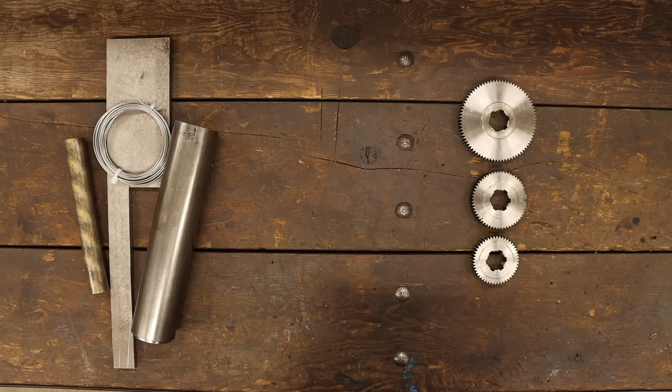The middle of projects is always a bit dumb. We're not where we started, but we're also not where we're going. We're just in the middle. I'm working on the Eureka gear cutter tool from this book about, shockingly, gears. So far I've made this, a useful-ish device, which basically just spins, but also makes these ear-wateringly delicious clicking sounds. There's so much more to this thing though, and even more than that to being able to properly use it. But I'm getting ahead of myself. We have the whole middle to cover, so let's focus on making this thing a little useful-er.

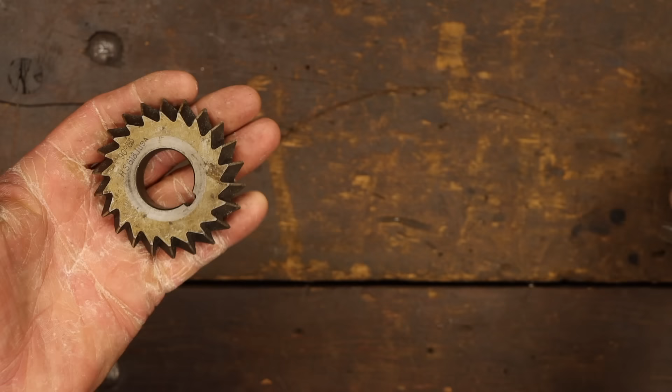In case I glossed over it too fast, this Eureka gear cutter tool is a contraption that should allow me to make my own gear cutters, so that I can make my own gears, so that I can say I made my own gears. It may also have something to do with this machine as well, but that's way down the road.

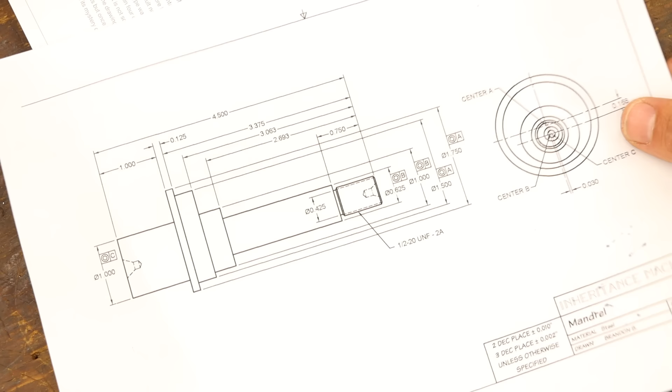Let's just pick up where we left off last time. Like most big hairy projects, it's best to start with the hardest part first, and the mandrel is definitely going to be the most challenging, but not this one, this one. Naturally, I've been making changes as I go based solely on hunches. Hunches about a tool I've never actually used, but I digress.

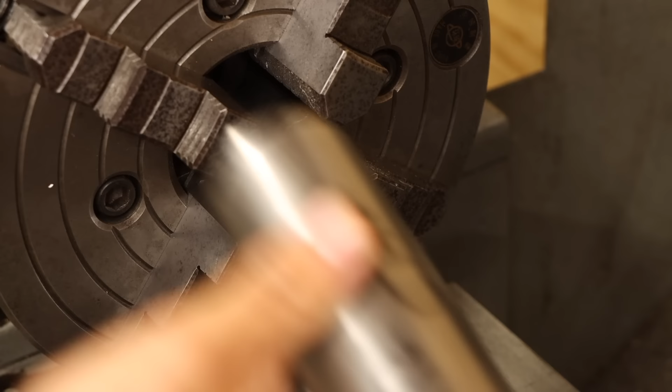While it seems like a simple shaft with some different diameters, if you look a bit closer, you'll see that it's a bit eccentric in nature. There are 3 different axes through this part. One for this diameter, these 2 big ones are on another, then everything on this end is on a 3rd axis. So the four-jaw is going to be earning its keep on this part.

After truing up the stock, I'll immediately untrue it with 2 opposing jaws to approximately 0.168 inches, which actually needs to read twice this value on the dial indicator. Trust me, forgetting this is a mistake you only make once.

With a little emotional support from the tailstock, we can start on some of the more punishing operations. Interrupted cuts like this are generally really hard on both the tooling and the part, so I'm going to use this round insert with a much larger radius. This lets the cutter more gradually engage with the metal as it comes around, rather than impacting the cutter all at once and shattering this brittle carbide insert.

Here you can actually see it without anything moving at all. The cut starts here, then gradually builds because of the radius of the tool. In non-machinist talk, this is more of a swoop swoop swoop rather than a chunk chunk chunk, if you know what I mean. Let's keep moving.

I've finished this end completely, but only got to start on the rest of the length. Why I did this will make sense in about 38 seconds, so let's part this off.

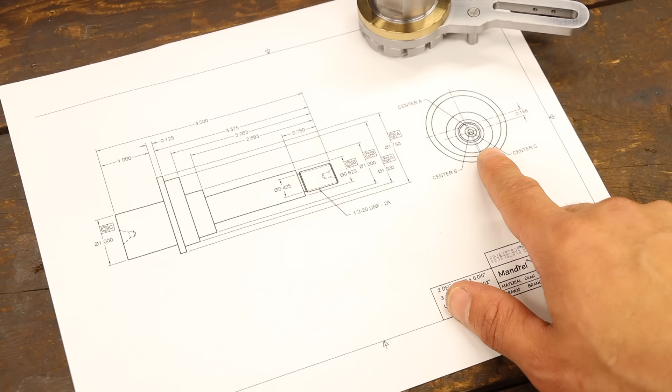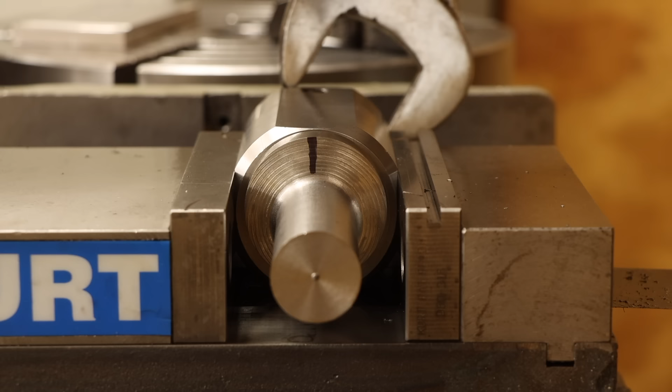Now this is where things get messy. Remember, these diameters have different center axes. So to keep things square, that's exactly what I'm going to use. A square collet block. But this only works if I get the part straight in the block as well, or in this case, just straight-ish. It's important, but I have some wiggle room, so no need for indicators.

Now this whole ensemble goes right back in the lathe, with a little protection on the jaws this time. And here's why I cleaned up that other end, just so that I can use it to indicate it back true. Pays to think ahead. But that isn't to imply that I'm an expert at it.

Case in point. I have to face this end to the correct length, but now I have no idea how long it is because I crammed the other end down in this collet block. Oh, I do know the distance to this face though. So I'll clean up the other side of this flange thingy, measure that thickness, scooch over that amount, zero the DRO, and crash the lathe.

Fuck me, I saw it right as I threw the switch. I was like, that's gonna fucking crash.

Nice. I think that's my sign to call it a day.

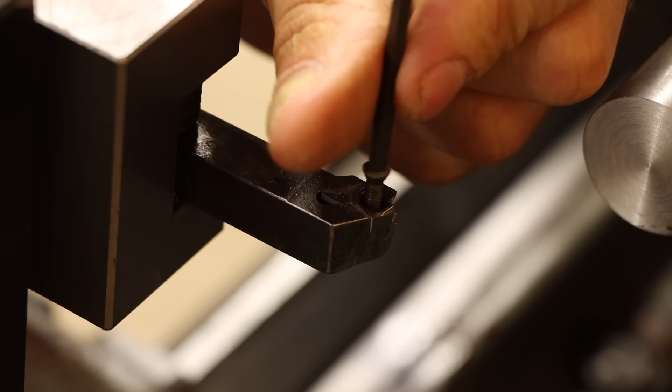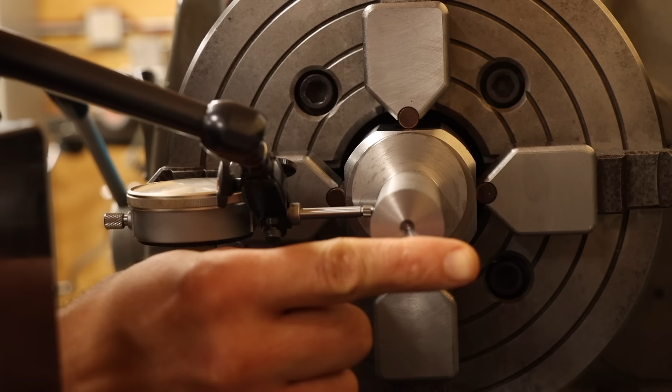All that setup and heartbreak was basically just to get this center drill in the end, which I don't even get to use because it's time to work on the eccentric stuff. And herein lies the advantage of the collet block - since each of these offsets are at right angles to one another, I'm pretty much guaranteed any shifts I make with the jaws will also be at right angles to one another, or at least really close.

So this first offset of 30 thou is just a matter of shifting jaws A and C. And I hope it's obvious now why I can't use that center drill from before. But it'll have a purpose later on, so hold your horses.

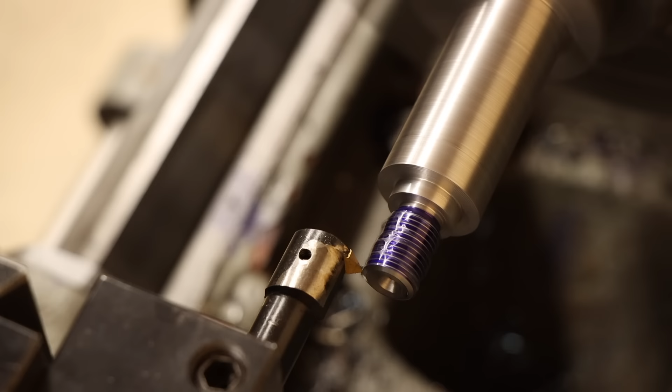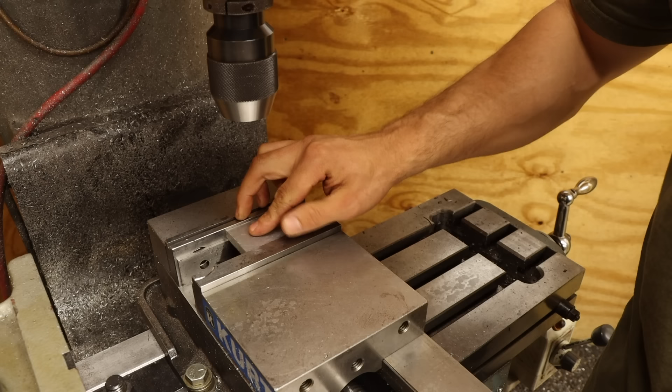Like most single point threading, I'll check the progress with the 3-wire method. But that doesn't necessarily guarantee a good fit with the nut that will go on here, so over on the mill, I'll make one real quick.

Don't worry, this isn't the actual nut I'll use. Of course I'll do better than this, but I need the lathe to make that, and well, it's occupied.

Perfect. After turning down the rest of the shaft, I'll do a light honing to perfect the fit with the spinny clicky contraption.

Oh, sexy. Okay, one more offset for the largest diameters on the part, this time shifting jaws B and D.

And here I just turned down past that carbide destroying mistake. Add another smaller diameter, then of course add some chamfers on here. Then boom, boom - one mandrel finished.

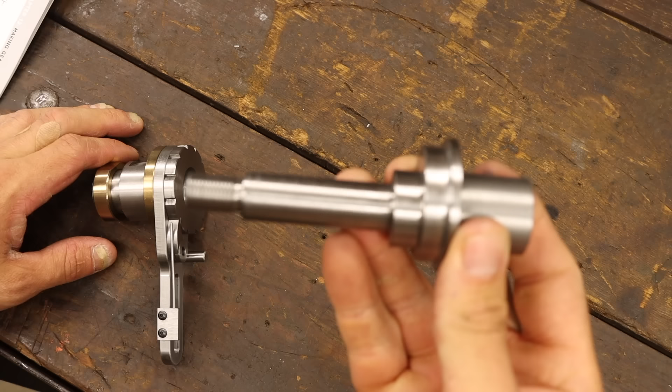And so far it looks like everything came out right. Of course it's hard to tell without seeing this thing in action, but a lot more parts to make before then. So let's go ahead and make the real nut that's supposed to go on here. The original design calls for just one nut, but I don't like that for a multitude of reasons, so I'm going to make 2. And this seems like a perfect opportunity to maintain the bronze accents I've been adding throughout this build.

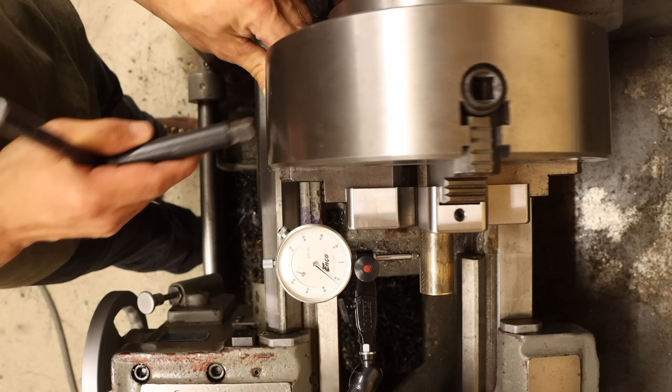I definitely prefer to single point cut these threads, but my smallest tool isn't small enough, so I'll have to tap these by hand, hence using the tap to make the test nut I did earlier.

The only trouble with tapping this is I can't be sure that the threads they make are truly square to the faces of the nuts. I do have a fix for this though.

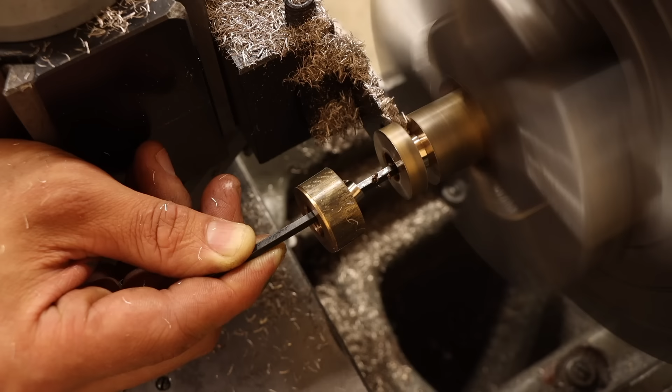Square is good, but it's also boring. So over on the mill, we'll make these more nuttier, with the help of the collet block, of course.

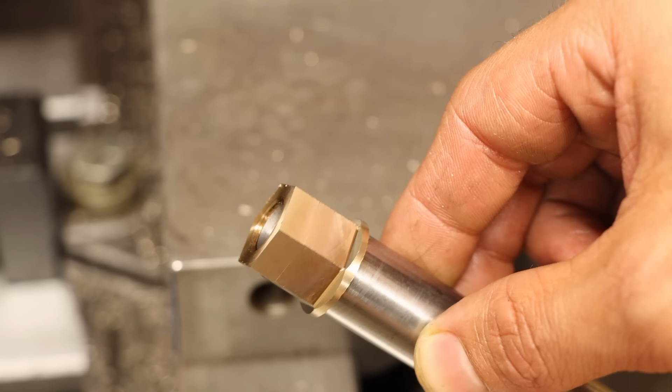Almost done. My obsessive chamfer disorder can't allow these to be finished parts, so it's back to the lathe.

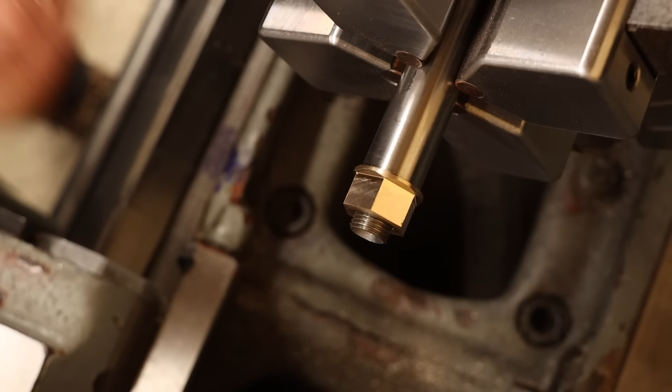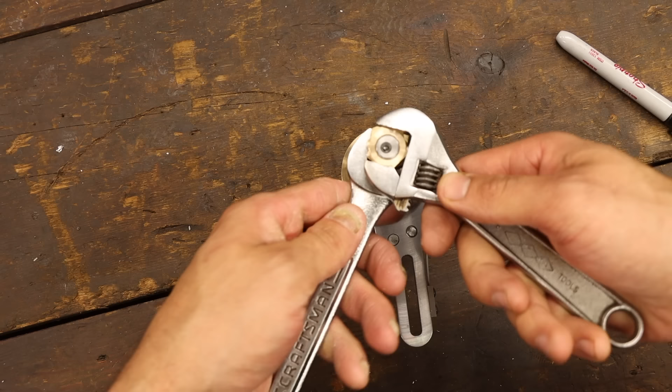That's the stuff. Okay, now why did I make two? Well, the first holds everything together, then the smaller holds the first in place. This is called a jam nut, and it looks great, except for one problem: when I crank them down, now they don't line up.

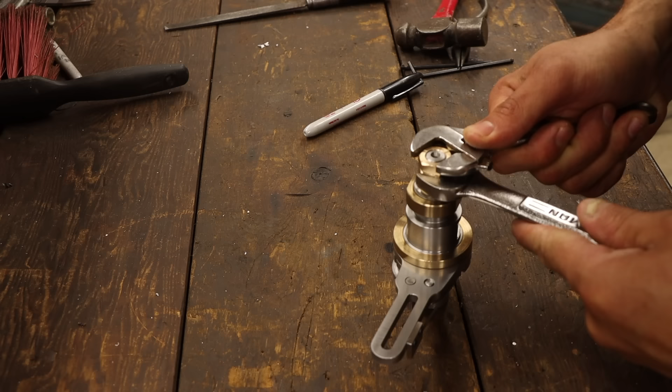Unacceptable. But a quick pop in the lathe to skim down a few thou off of one face, and now these clock together perfectly. With that, now I have a fine looking spinny clicky doodad.

But this is clearly imbalanced. I'm going to need the second clicky to even this out. So let's work on that next, starting with the ratchet plate.

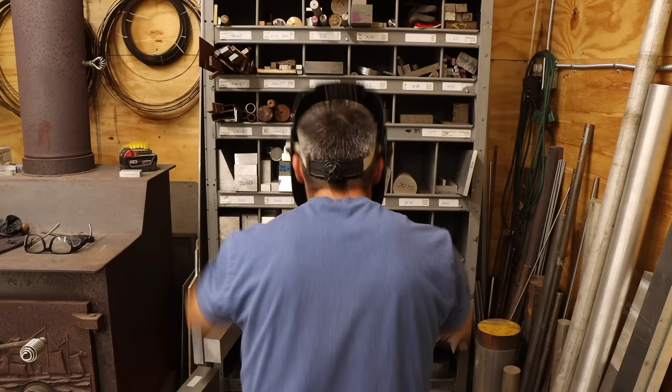I don't really want to go through the process of squaring up a bunch of stock to make this, but maybe if I pray to the material bin gods hard enough. Hey, it worked! Okay, let's jump into the fun stuff, starting with some holes and slots.

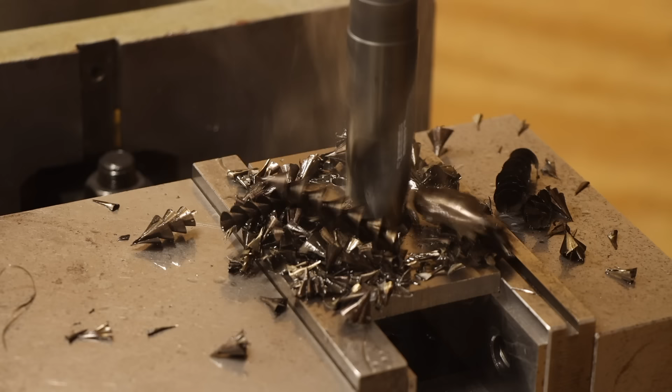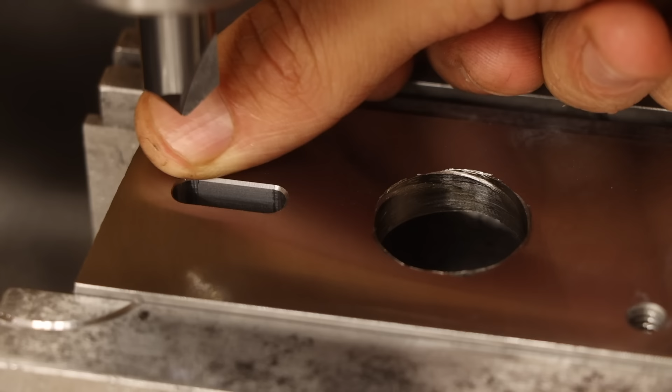We love a chamfer. Time to open this big guy up even more. And this next part might be a little, well, I don't think I even need to say it at this point. Sorry, I know this joke is getting a little...

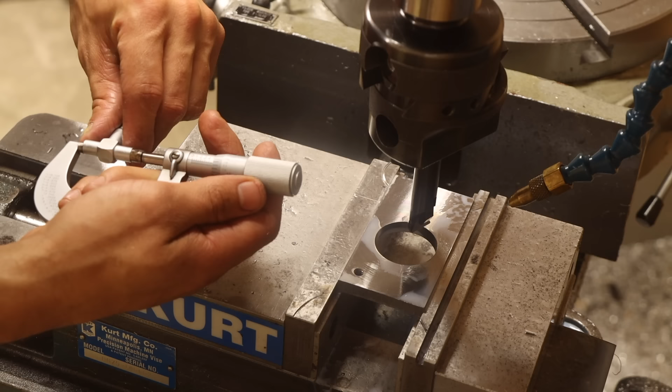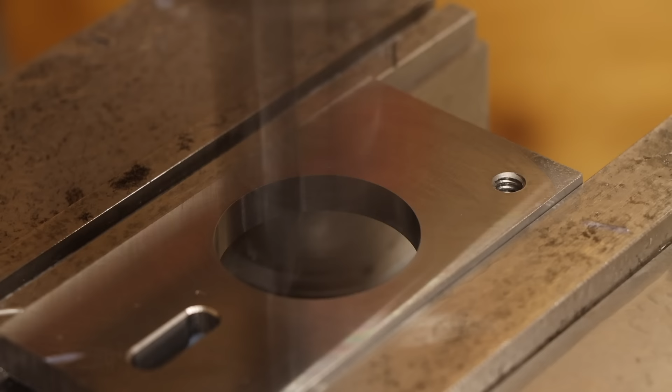After a little funny business with the insert, I can also chamfer this big guy, then flip it over and do the deed on the other side. I'll relocate the part with a gauge pin and the spindle, then continue the glorious chamfering action.

Okay, that's all the penetrations, time to work on the perimeter. And that's a perfect job for the honkin' rotary table that's been hanging out in the background of the mill this whole time.

After finding the center of the table with the coaxial indicator, I'll pop the part down and use a gauge pin to locate on the end of the slot. This gets it centered, but who knows if we're square. So I'll tram along this edge, spinning the rotary table a little bit until there's no more movement in the indicator. Then of course reset the table's dials.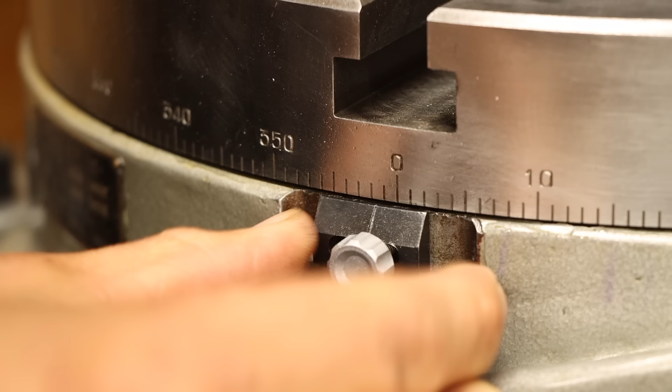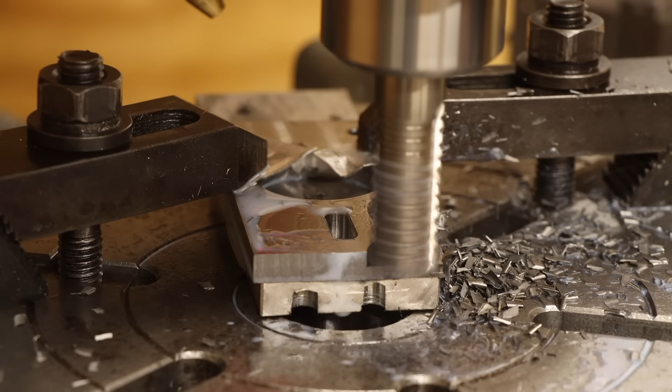Now for some chips to go with this fish. I'm using a roughing mill for the heavy lifting, first milling straight along here, adding the round on the end, and finishing straight again on the other side. The roughing mill doesn't leave the best finish though, so I'll do that all again with a finishing mill.

And while we're here, might as well add the most important features.

Alright, now for all the big rounds around the big hole. Don't exactly have a gauge pin up for the job, so it's back to the coax. First tapping the part into place, another tramming job with the indicator, and I think you can figure out the rest. Now I'll admit, I cheated a bit at this point.

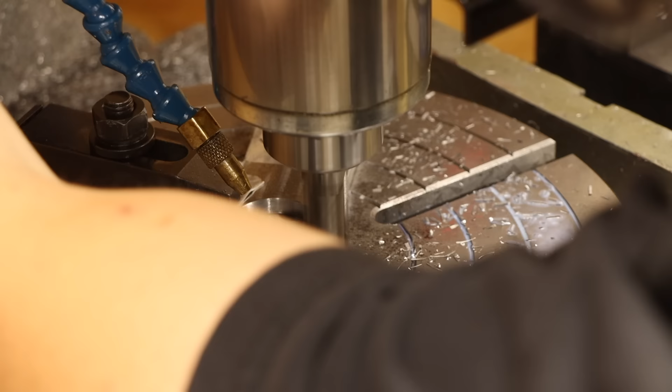The drawings for this part didn't include much in the way of angles, and by that I mean literally nothing. So I went ahead and modeled this part so I can project more angles than I actually need.

The last bit is this little dude on the end, which is around this threaded hole. So what better way to center it than to use the very tap that made that hole. Bada bing.

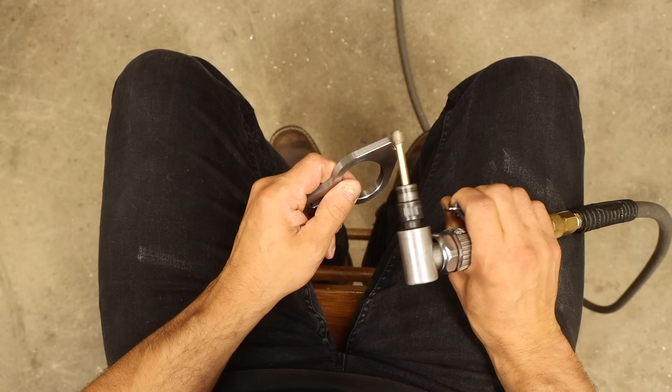Looking great, but now I have chamfers to do on the other side. I could go through the trouble of setting everything up again, upside down, or I could just... I think that's perfectly acceptable.

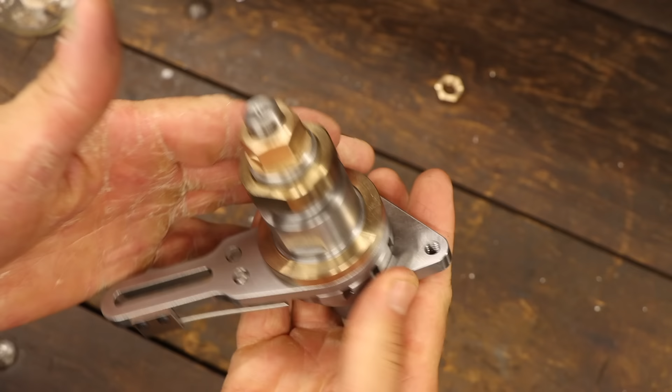With that in place, we're getting really close to some more clickety-click noises. So let's make the bit that will sing those sweet serenades: the ratchet pawl. This is basically identical to the pawl I made in the last video, so just enjoy.

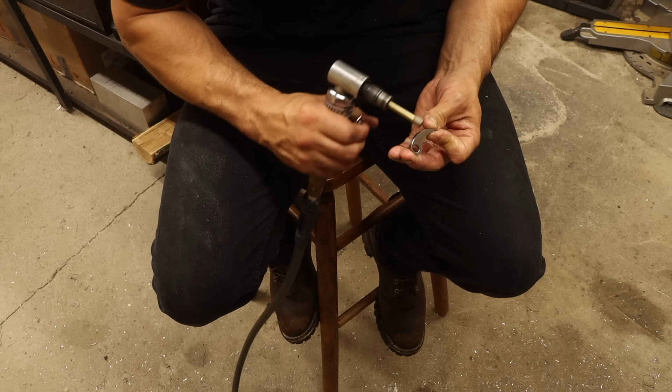Alright, well it wasn't without hiccup, we made it. But it isn't ready for its performance yet. Not without the backing tracks. And by that I mean the pivot screw that holds this in place.

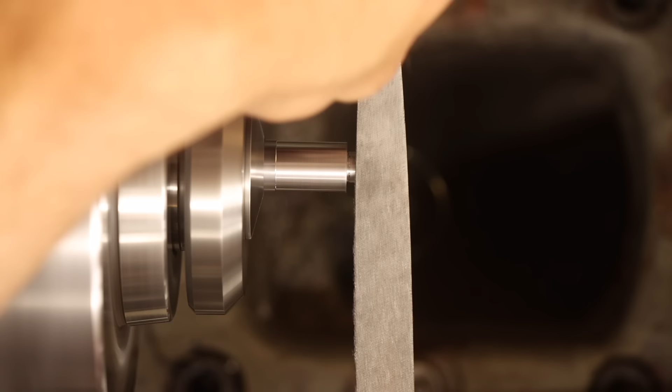This is a simple enough part with a few different diameters on one side, one of which gets threaded with the die holder. Then after parting it off, the other side gets a similar deal.

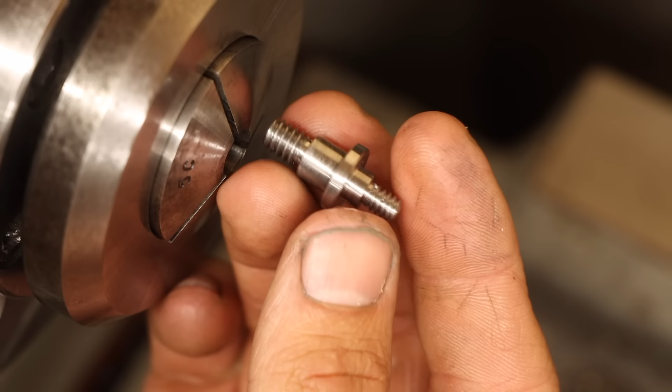Easy peasy. Where there are threads, there are usually nuts, so take a wild guess what's next. And of course I'm using bronze on this one too.

Can't forget the chamfers on this one either. And after parting this off, I'll use this nifty pre-made mandrel I found to hold the nut for finishing.

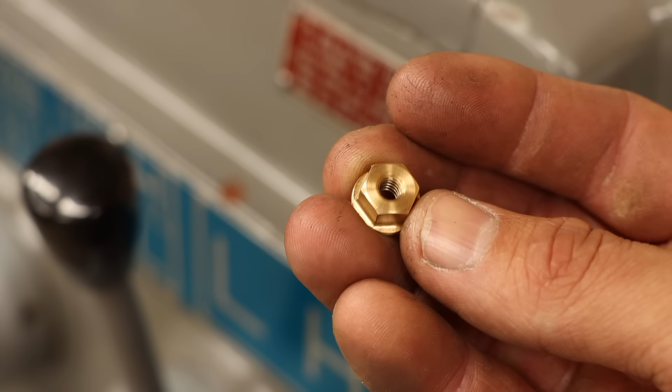Beautiferous. The nut and the pivot go on the assembly like this, but you can see there's a suspicious looking gap here. Well, that's because we have one last piece to make: a spring. And unlike the one I made last time, this spring actually needs to look the part. To do that, I'll need a side project.

So what does this mysterious piece do? Well, it's a spring-forming mandrel. Lots of mandrels in this video, huh? But this one's the coolest by far.

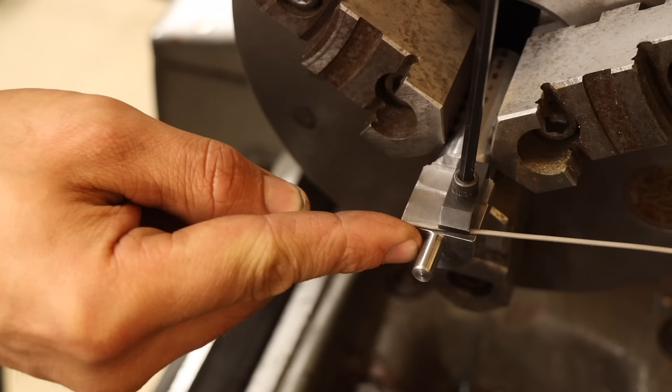With the help of this clamp I stole off of one of my other tools, I can secure a bit of spring wire in here, and then wrap the wire around the mandrel to form the coils. But that will only work if I can keep the wire tight.

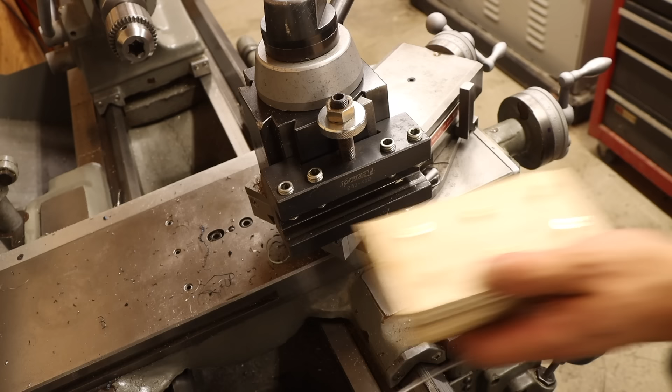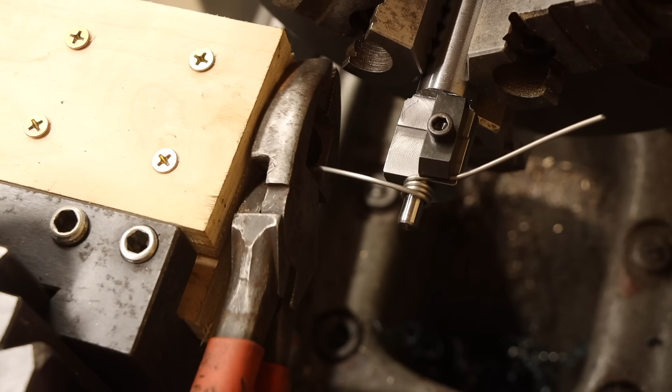That's where this masterfully crafted bit of kit comes in. Between these precision machined boards, I can feed the wire and fasten it tight with these coarse-pitched helical inclined planes. This keeps tension on the wire so that it wraps tightly around the mandrel. And bingo, we have a torsion spring.

This one looks a bit rough, but it was just a test. Even though I kept the wire very tight, it's always going to have a bit of spring back. In this case, about 33 thou on this inside diameter.

So I need to make the mandrel even smaller by proportionally that amount, or about 30 thou smaller. I'll also file a bit of a lead-in to smooth the transition from the flat to round. Okay, let's give this another go.

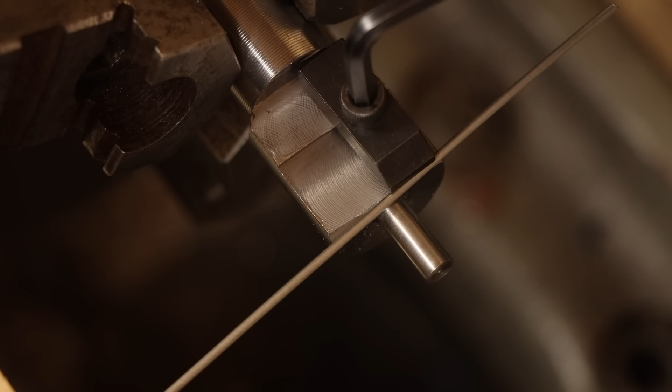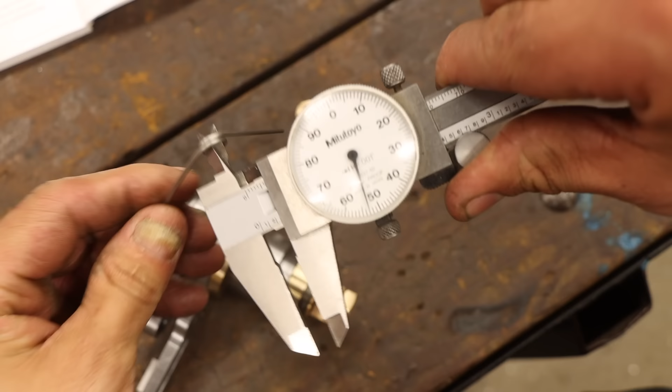Just a hair oversized, but that's pretty much perfect for a little clearance room. And after a little trimming and more forming, I get this, which I think is not too shabby for a first attempt at a torsion spring.

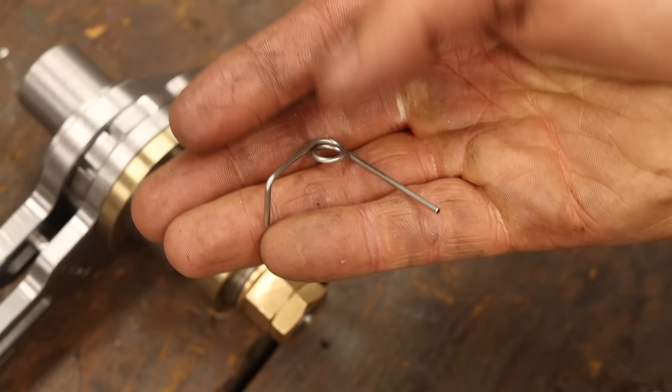Let's get it in place. Oh yeah, that is so good. A proper double spinny, double clicky Eureka tool.

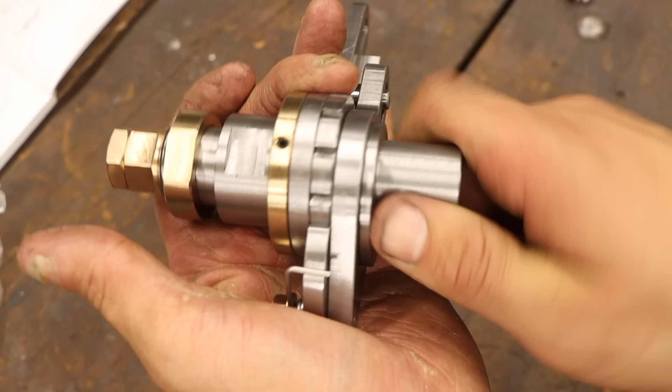But something isn't right. It ratchets fine like this, but in actuality, all the spinning should be coming from this eccentric mandrel we made earlier. The mandrel ends up pushing this ratchet pawl, which in turn rotates the indexing sleeve, but you can see it doesn't push it far enough for the ratchet pawl on the other side to engage.

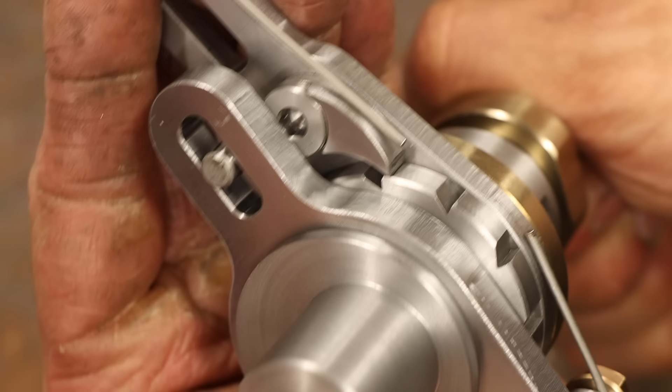I spent a while poring over the drawings and verifying the measurements of all the parts when I noticed something small. This particular dimension on the ratchet pawl in question is listed as nominal, which in machinist terms means this number is bullshit, just make it work. So that's exactly what I'm going to do.

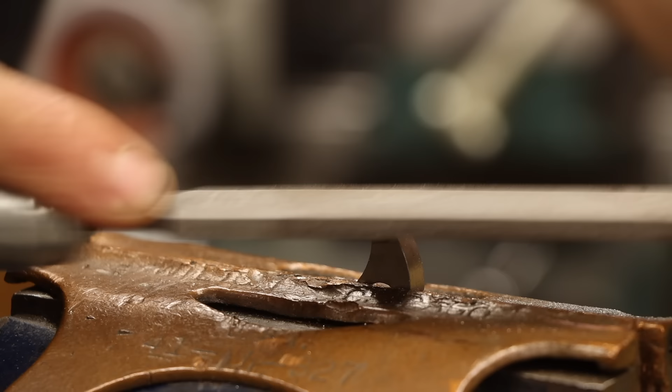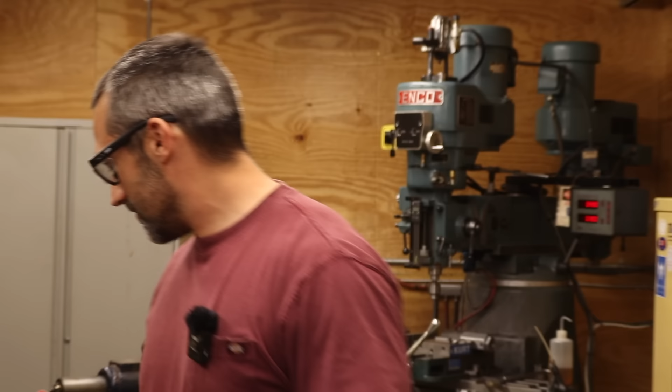There we go, clicking when the clicker should click. Perfect, I think we're finally ready to see what this thing does in action. And like most things I get excited for, I'm going to bring in the head engineer to share in the moment.

How is it that I turned the AC off literally 30 seconds ago and I'm already sweating? It's the placebo effect. Head engineer? Are you saying I'm the head engineer? I don't think... that's what I called you.

Between the two of us, I would much rather fly in a plane that you designed than one that I designed. Okay, mine don't look pretty. Satisfied with that? Yeah, yeah, that works. I didn't behead you. You did not behead me.

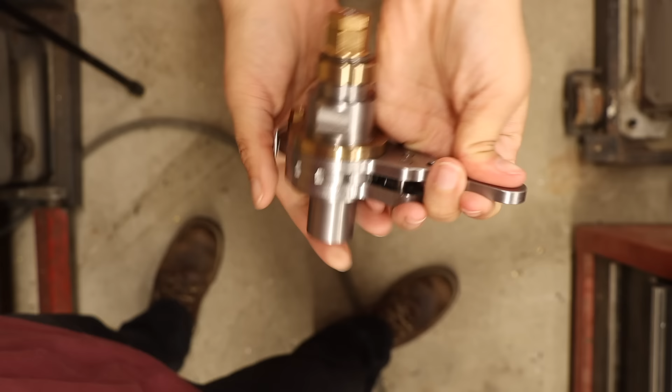Your hole's a little off center here. It's supposed to be. Why is it not doing it? There we go. Are you impressed? I am impressed that you made a lot of metal look like different metal. How about the colors? The colors are beautiful.

The colors are quite an Inheritance Machining signature. You can see my Tootsie stuff. Don't look at them. I know I'm not wearing shop-approved shoes, but... Well, you're not doing shop-approved things, so...

Oh, you have another spring. Yes. You made this spring, you made that spring. I showed you that spring. I showed you making that spring. Well, I showed you how I made that spring. We have some of that footage. We have a whole bunch of footage from that.

Inserted here. I want you to see this. So I know you want me to see this, but why don't you come over here and look? The camera's set up, I'm looking at the camera. I want you to see it in real time.

All right. Oh wow, shut up, that is very impressive though. It looks like a slow motion version of the How It's Made springs. So I could turn the lathe on and it would be like the real How It's Made springs. That is excessively impressive. Organic tool holder is very nice too. Yeah, I didn't show how that's made because we don't do woodworking on this show.

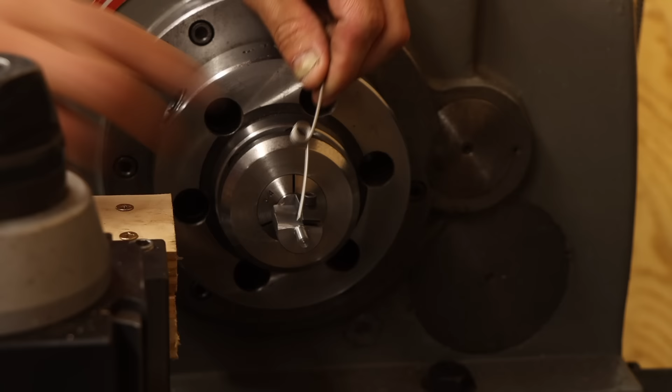And we're back. Okay, doesn't this do a wobble spinny? It does a wobble spinny. Well, show me what it does. Yes, let's set it up.

So you got a pointy in the chuck. I got a pointy there and a pointy there. Well yeah, but that pointy's always there. Can I do the tailstock? Of course I can do the tailstock. Easy, okay, bring it in. So this pin goes in there, and that's what keeps this thing from spinning.

Are you ready? I believe I'm ready. Throw that switch, mother. I've never turned the lathe on. Have you never? I have never turned the lathe on. Does it go down, like out and down? It goes in and down. In and down, okay.

So you see how it's kind of whoop, whoop, whoop, whoop. That's extremely satisfying. Isn't it beautiful? It's like one of the most complicated mechanisms I've made to date. That is so cool. I should stop putting my hand on the stupid chuck. You should.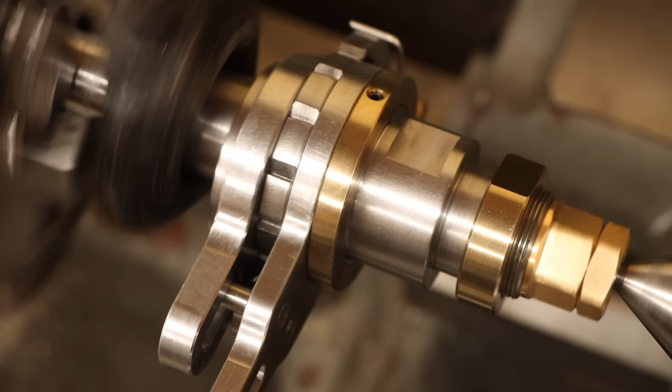Oh, that's satisfying. I'm so excited. I see a pen and I see a circle and I see things. This simulates a gear cutter blank that I'll put in here. Okay, and this is the important part of why I'm making this. This is the path that it makes, okay? All right, ready? Yep.

That is so cool. Behind each tooth, it's angled back. That's what that is. So this is the Eureka form relieving gear cutter tool.

I love your demonstrations, you've done a couple of these. This one was particularly inspired. I would say that this slightly surpasses the rotary broaching of the Play-Doh. Yeah, it'd be very much interesting, cooler to see it actually make a gear cutter, but that's a whole nother video. That's an entire, 'cause yes.

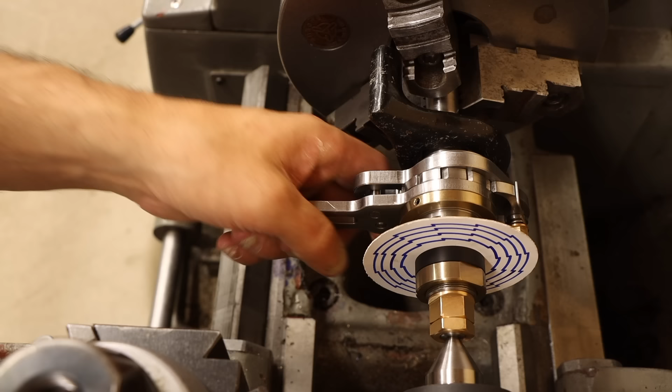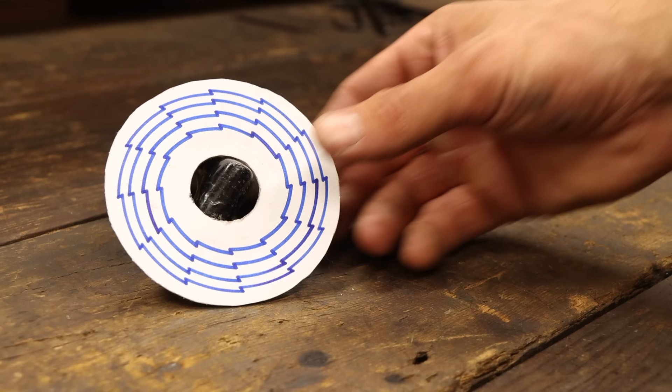I have to make the cutter holder, and then I've got to make all the cutter discs, because depending on what size gear you're cutting, you have to make different size discs, and they all have to be hardened. Amazing, amazing, amazing. Okay, so yeah, a bit more work before we're cutting gears, but nobody ever said this was going to be fast or easy. Remember, we're still in the middle. So tune in next time where we'll actually make some gear cutters, and if I'm being optimistic, might actually make some gears. As always, thanks for watching, and see you next time.

The starfish. The dead guy. The zombie. The roadkill. The Olympic diver. Sleeping's hard.